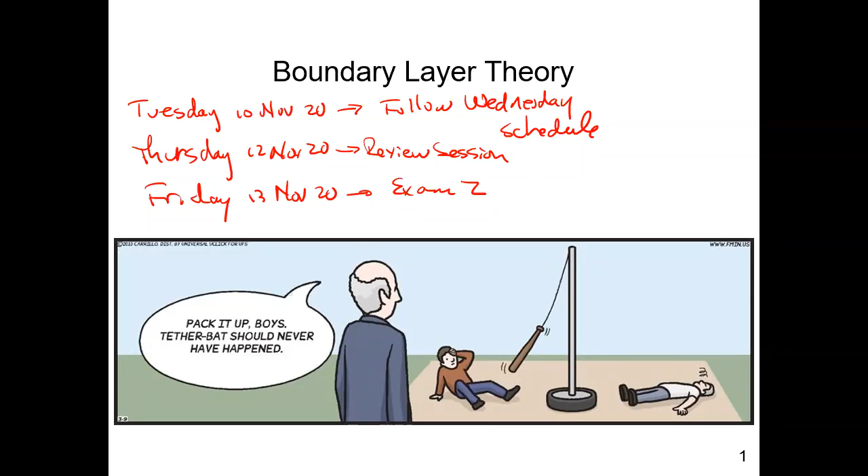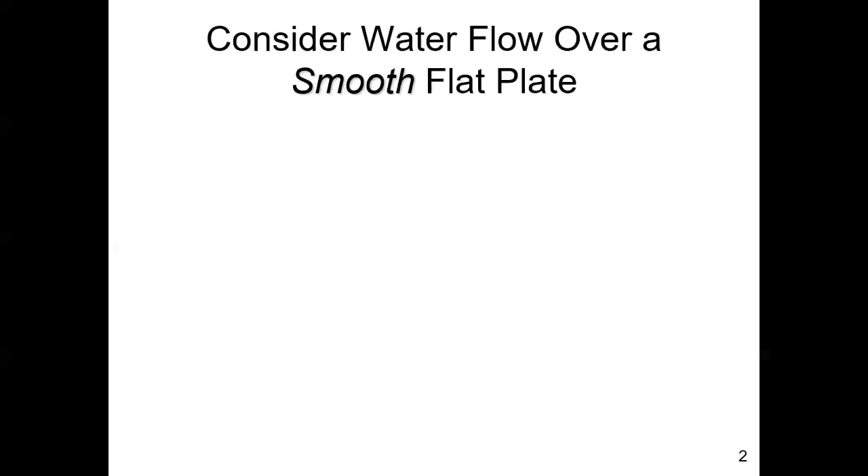So we're going to consider having a flat plate sitting in a fluid. Before the flat plate, the fluid is moving in this one-dimensional velocity vector.

It's just moving at a constant velocity, capital U, minding its own business. There is a fundamental fluid principle. It's never theoretically been proven, but it's been empirically measured many, many times. It's called the no-slip condition, and it's particularly true when you have fluids that wet solid surfaces, meaning they would like to stick to a solid surface. The no-slip condition says that the velocity of the fluid at a boundary has the velocity of the boundary. Very simple statement, no mathematics involved.

So the plate's sitting still and the fluid's moving over it. At the plate boundary, that fluid molecule will have the velocity of the plate, 0, it's just sitting there. However, because the fluid above the plate is moving, there has to be a transition in velocity from that of the plate, which is 0, to whatever that free stream velocity is, capital U. So instantaneously at the leading edge, you have one fluid molecule at 0 and the other one at capital U. Remember, the change in velocity over distance is the velocity gradient, and that's proportional to shear stresses.

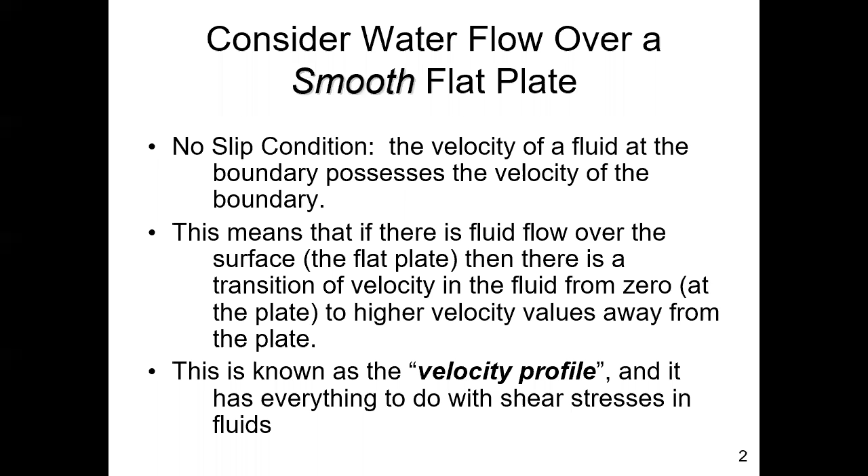So this is what I've been describing. You have, starting out right here, this velocity profile, and each of these velocities is moving at capital U. Then again, at the leading edge, this no-slip condition takes over, and what you see is the growth of this zone where the velocity is transitioning from U to the velocity of the plate. In this case, if the plate is fixed, it's at a velocity of 0.

You can see how this zone is occurring, in which U -- if this is the x dimension and x equals 0 starting at the leading edge, and y is perpendicular to that direction -- then this velocity profile, U, is a function of where you are in space in the y location. So if you're down at this location, you have a smaller value of the velocity than up here. Again, this is all because of the no-slip condition, and that is a signal. It's telling the fluid through this zone of transition that hey, there's a location where there's a boundary. That's all it does.

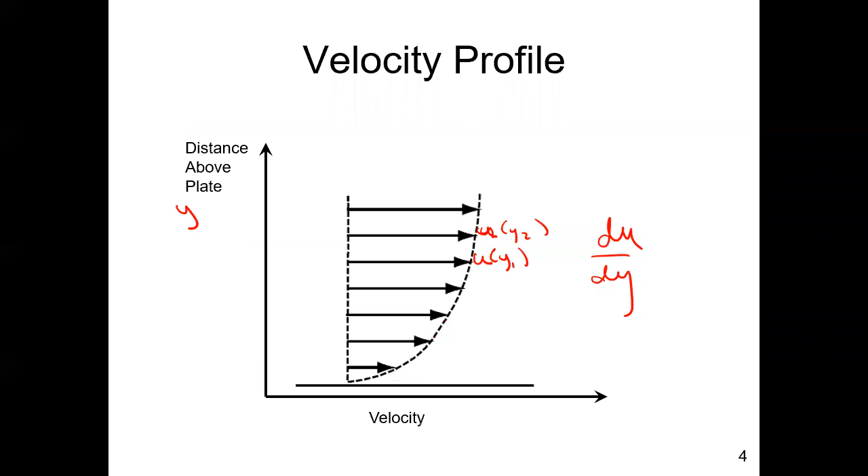So it's the distance from the solid boundary up to where you're back to the free stream velocity, capital U. We call that the boundary layer. And we live in the boundary layer. Many of the things we design occur in boundary layers, so this is incredibly important to everything we do in moving fluids around.

For the boundary layer, people have not theoretically derived the no-slip condition, but they measure it. That's called empirical evidence, so there are empirically measured characteristics of this boundary layer. The boundary layer is a region where fluid movement can be characterized by pretty structured movement, that is, the fluid is moving in laminae, sheets almost. That's one type of characteristic.

You saw this in your labs when you had the pipe and you were putting dye into it. The dye could stay in a nice, structured lamina as it moved.

The other end of this is where you have completely chaotic movement of the particles, and there is no structure or laminar movement. In this case, all the fluid movement is characterized as turbulent. Basically, turbulence is three-dimensional vortices always moving through the fluid. So at one particular point, the velocity could be all over the place, with components in all 3 directions. Those are the 2 end members: nice structured movement to completely chaotic.

In between is this transition area. In the transition area, you may have a subregion with laminar characteristics, but above that you have the chaotic movement of particles.

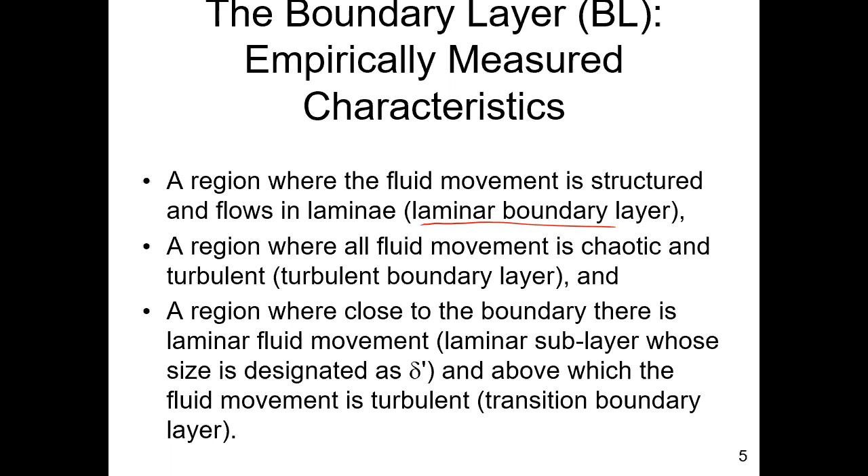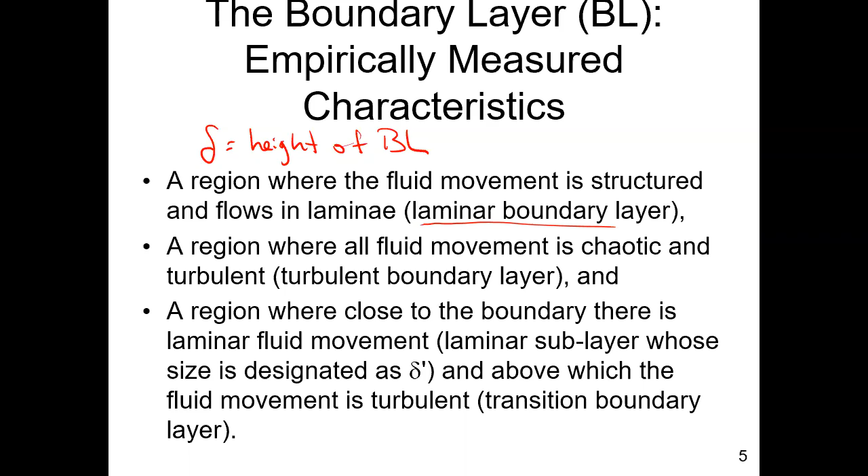So we'll call the height of the boundary layer delta. Delta goes from the solid surface to where the free stream velocity is again achieved. Where we're in this transition region, we may have a sublayer, delta prime, where everything is laminar. This is all in the handout for today.

In a sketch, the plate starts here, here's the x-axis, and the y-axis is in this direction. We have the free stream velocity everywhere at capital U, and then it touches that surface. That's when the no-slip condition starts, and everything follows through with that. So the boundary layer, this region where the velocity goes from 0 at the plate to the free stream, this boundary layer distance is delta.

There's a region where it's laminar, and then another region where it's all turbulent. These would be average velocities in here, and above this region we have the free stream. To the right is where we have chaotic movement of particles, the turbulent boundary layer as it's known. To the left we have a laminar region, and in between we have a transition.

What's happening in that transition is there's this laminar sublayer. At the very beginning, the leftmost portion of this region, the entire boundary layer is laminar. But at the very upper edge, those molecules, moving against the free stream velocity, become unstable, and turbulence initiates there. As you move through the transition region towards the turbulent region, this turbulence increases at the expense of the laminar sublayer. Ultimately, by the end of the transition region, that laminar sublayer has disappeared completely.

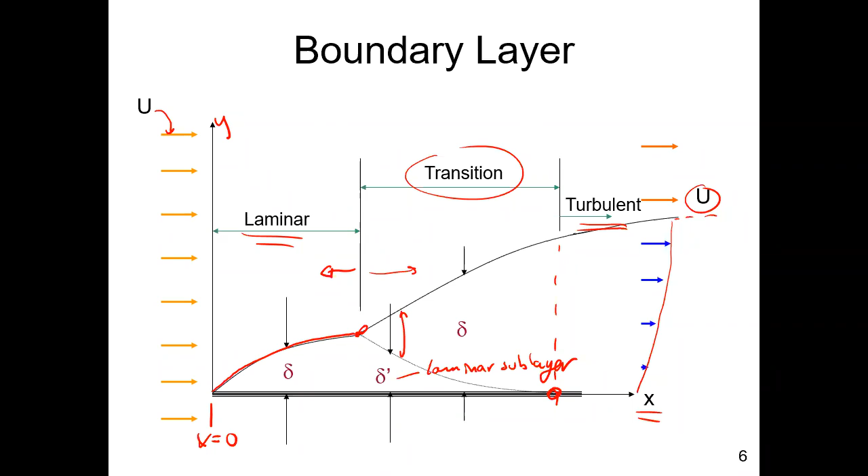This is actually incredibly important. We use this to our advantage in design, and many creatures have adapted their strategies to take advantage of this, if you believe the Earth is greater than 4,000 years old. For example, why a shark's skin is as rough as it is has everything to do with this diagram. Again, the height of the boundary layer is what we call delta, and the height of the laminar sublayer is delta prime.

So how do we classify these regions? Well, the laminar region occurs where the boundary Reynolds number, which I will explain, is less than 500,000. The turbulent region is where the boundary Reynolds number is greater than 10 million, or 10 to the 7th. This is all based on empirical evidence and measurements.

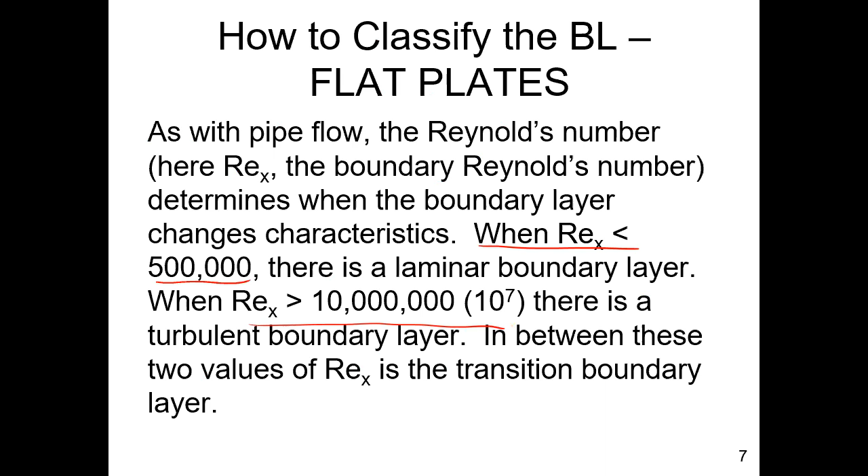Going back to this figure, for any particular situation we can calculate where the laminar region is, where this boundary Reynolds number equals the velocity times the distance along the plate, divided by the kinematic viscosity.

In some of your labs you've had to calculate Reynolds number. The Reynolds number is a force ratio. Even though the numerator and denominator don't look like forces, it's because certain things have been canceled out. In the numerator you have the force due to inertia, and in the denominator the force due to viscosity.

The Reynolds number is a dimensionless number. That means the dimensions on the numerator, velocity times distance, which is length per time times length, or length squared per time, have to be the same dimensions as the denominator. Kinematic viscosity has dimensions of length squared per time. So for any situation, to get that 500,000 you could have different values of U, different values of X, and different values of kinematic viscosity depending on the fluid. There's an infinite number of possibilities to get to 500,000.

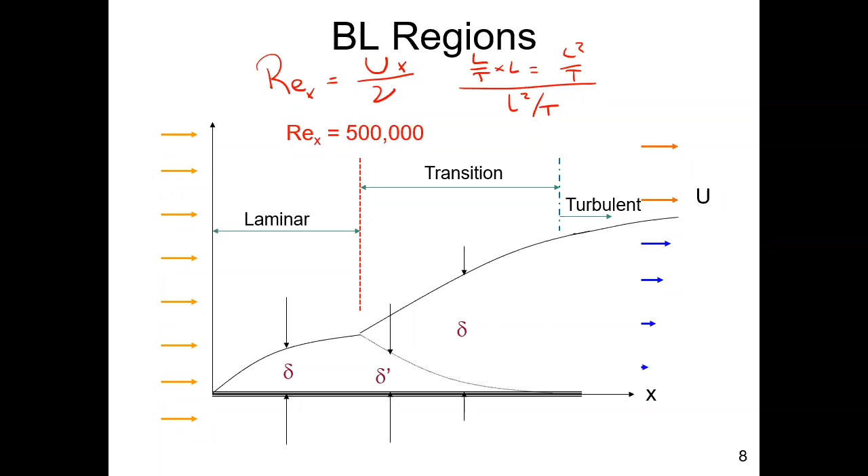Likewise, the turbulent region starts where the boundary Reynolds number is 10 to the 7th or larger, and again there are infinite possibilities to get the boundary Reynolds number greater than 10 to the 7th. If we're in between those two zones, we have the transition.

If you look at the last page of your handout, the handouts are over there in case you'd like to grab them, on page 6 there's a large table. This is often one of the pages people use for their crib sheet on the third exam, but all these equations are in your textbook, guaranteed.

You will see in the left column these variables, delta prime, delta. The next column is boundary Reynolds number less than 5 times 10 to the 5th. The rightmost column is boundary Reynolds number greater than 10 to the 7th. The center column is when you're between those two values. You have an equation for each variable depending on your boundary Reynolds number. Today we're just going to focus on the second column.

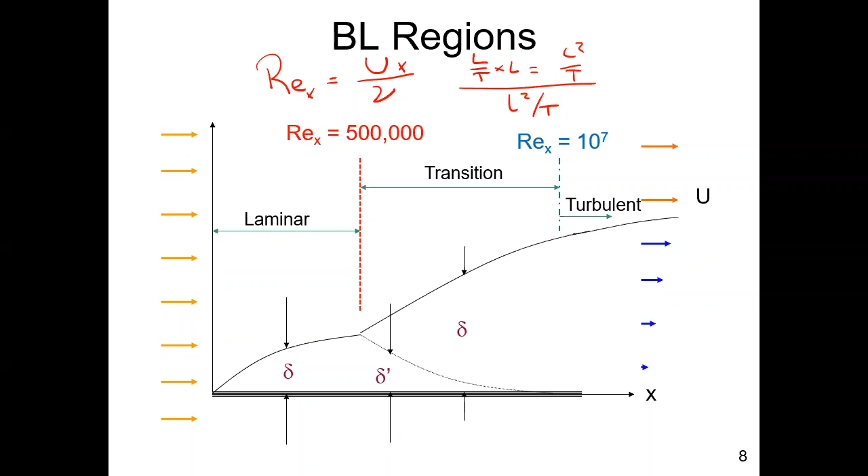We're going to look at the laminar system. Okay, so that's just a teaser. That's where we're headed, so let's get there.

Remember, the boundary layer is where velocity is changing vertically away from the plate. If you look at this, you have velocity on the horizontal axis and distance away from the plate on the vertical. Blasius made this into a dimensionless diagram. U over U0 is just U over capital U.

So that maxes out at 1.0. That's when you're at the very top of the boundary layer, and now you're going into the free stream. So the velocity right at the top of the boundary layer is almost the free stream velocity.

To make the vertical axis dimensionless, y over x is dimensionless, and to include some fluid properties, even though the boundary Reynolds number is already dimensionless, the vertical axis is a dimensionless number. This applies for the entire boundary layer, for any laminar boundary layer in any situation. What's nice about this is you'll notice the lower portion is linear.

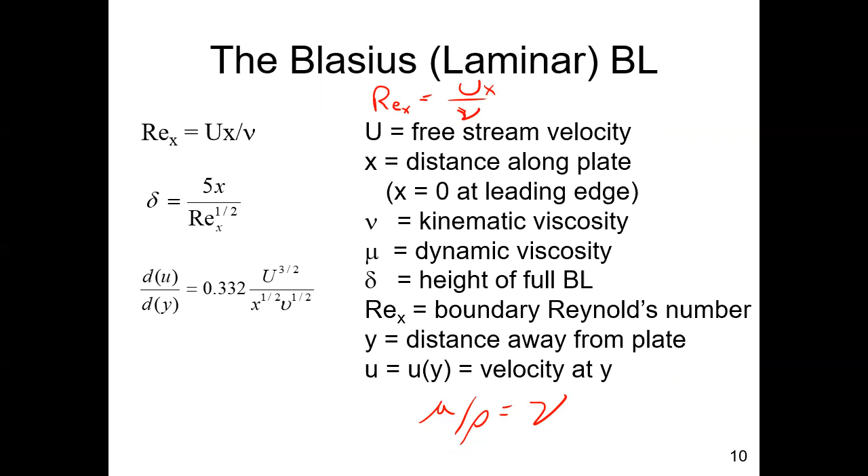The other thing you can deduce when you're looking at that linear section very close to the origin is that it has a constant slope. Remember, we had a plot of basically U versus Y. So du/dy, when you look at this equation, is the inverse slope. Half a dozen one, six of the other. You could look at dy/du, but to us, du/dy has relevance.

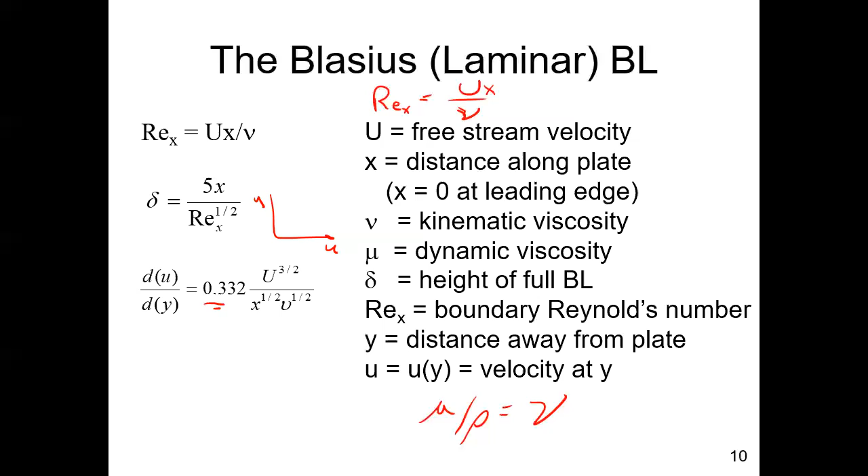So again, right from this dimensionless velocity distribution that Blasius had, the laminar velocity distribution, this has held up for over a century. Since 1900, this stuff has worked, and it's a very good descriptor of what's happening. So again, this is the velocity profile from which all those equations emanated, because we know the characteristics of this are known. And he based this on observations, but then actually theoretically derived it.

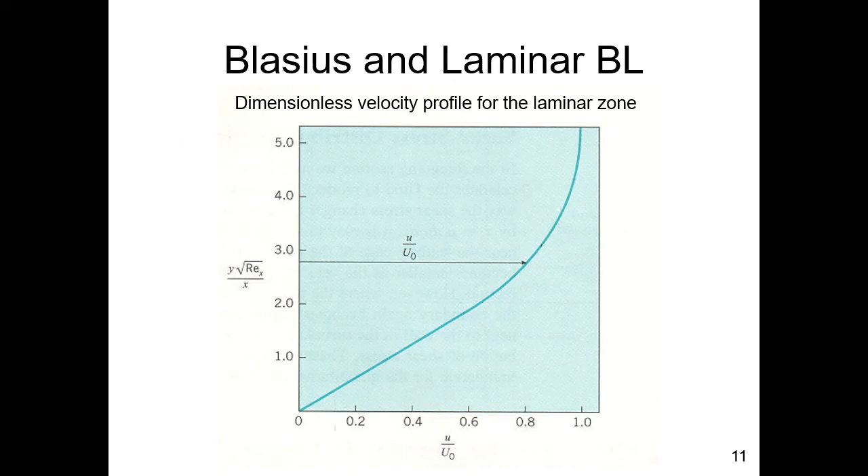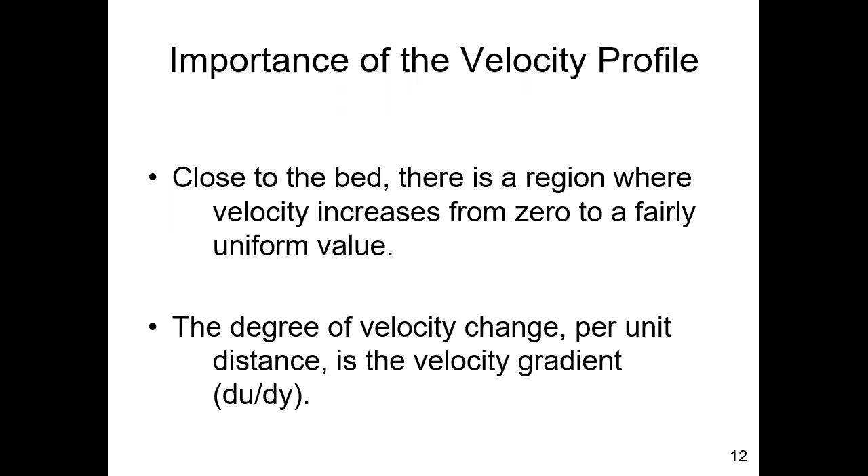So what's the importance of the velocity profile? Close to the bed, where the plate is, there's a region where the velocity increases from 0 to a fairly uniform value. The degree of velocity change per unit distance is the velocity gradient, du/dy, as we indicated before. I want to go back to this slide.

I think we're going to see it again, this one. So remember, we start here, and then we move onto the plate. We're going from the plate velocity to the free stream velocity. That's du. At the very beginning of the plate, it's happening over an incredibly small distance. As we move along the plate, that distance is getting larger and larger.

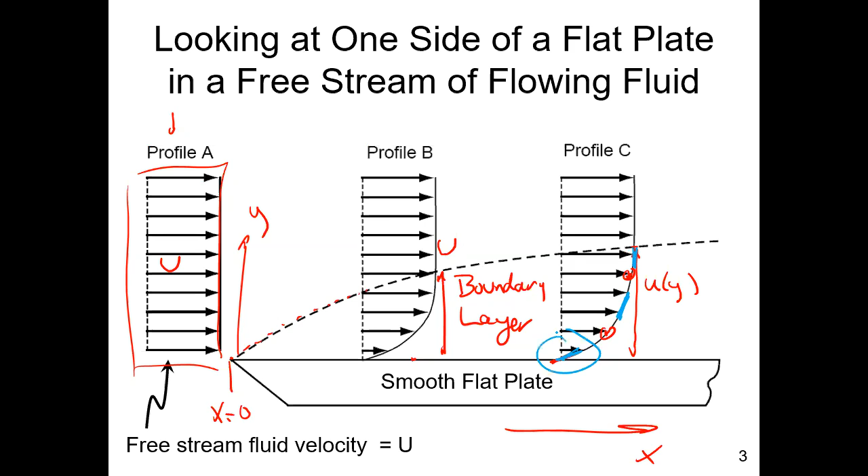So where is du/dy the greatest? Right at the leading edge, and also right along the surface. As you can see the slope here, let's change colors. The slope here, remember du/dy, is steeper closer to the bed than farther away. Ultimately, a vertical line is a slope of infinity, but we're looking at the inverse slope, so 1 over infinity is 0. So the steepest slope is closest to the bed.

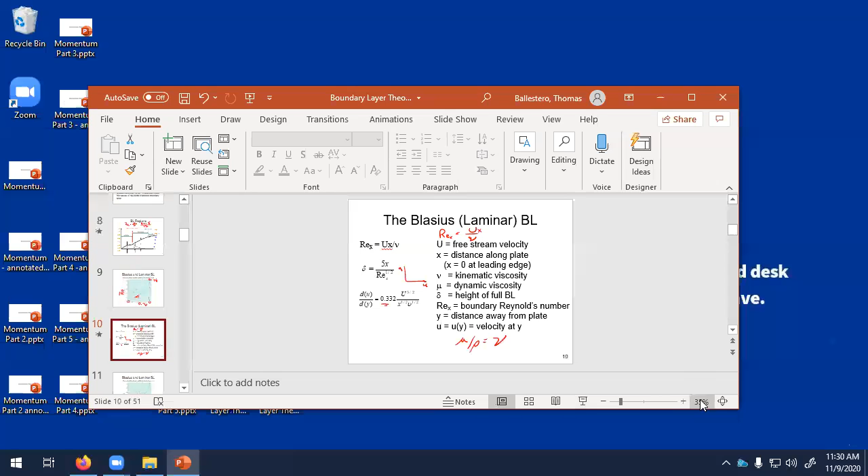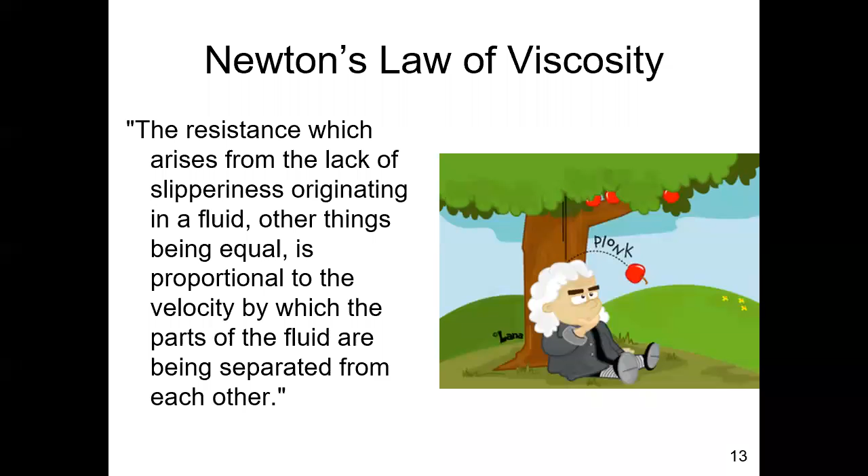So a long time ago in this very virtual class, we talked about Newton's concepts of what was happening within fluids. This is the translation of his actual original text identifying the relationship between velocity profile and resistance to movement. What Newton hypothesized was laminar flow, where you have one sheet or lamina moving over another, and they're moving at different velocities. Just like when you rub your hands together, you feel the heat occurring, that's due to frictional resistance. That's what's happening here. So there must be frictional resistance when you have relative motion of these laminae.

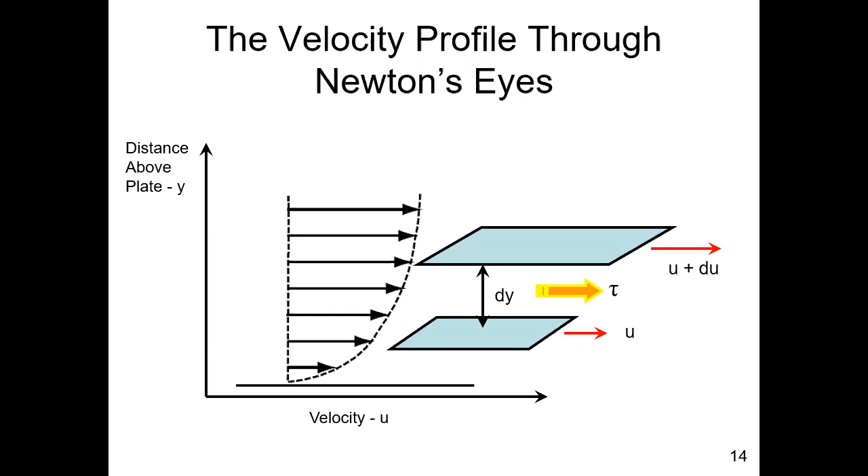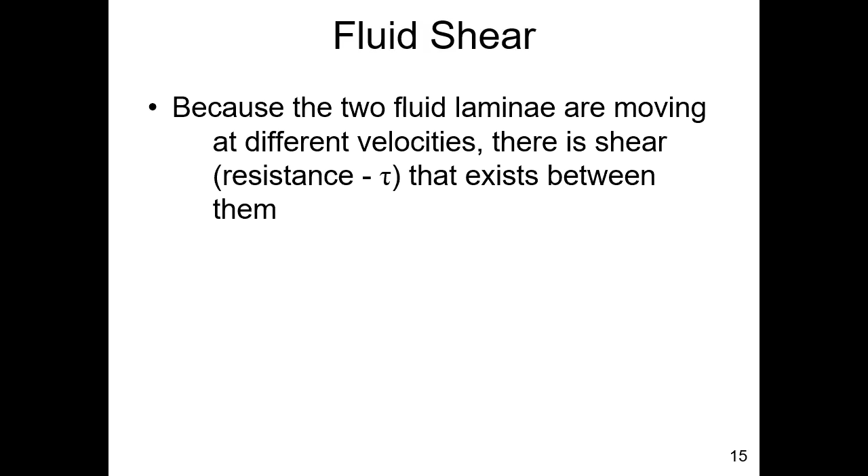What Newton hypothesized was that the magnitude of that resistance, which we call shear stress, is proportional to the velocity gradient, du dy. He theorized that when fluid layers move at different velocities, shear exists between them, and the shear stress should be proportional to the velocity gradient. Since it's tough to work with proportionalities in equations, he created a proportionality constant, the viscosity, which is what we used earlier when discussing fluid properties: Newton's law of viscosity.

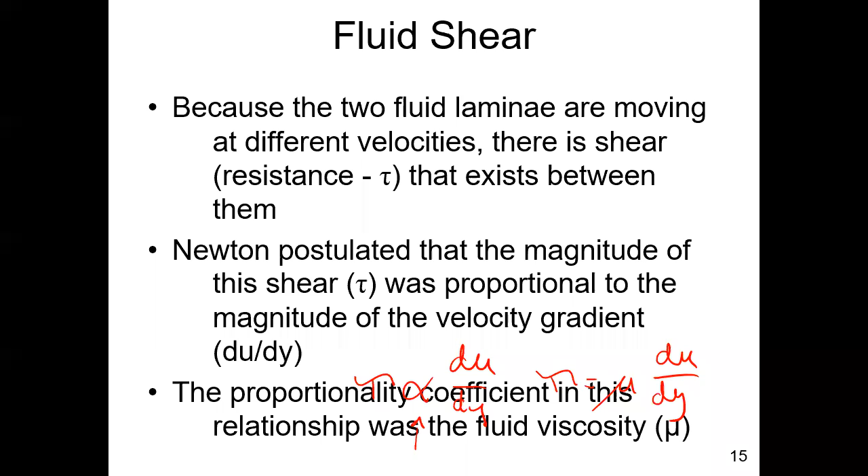Oh, what do you know? I'd already written it there. Okay, so this is Newton's law of viscosity.

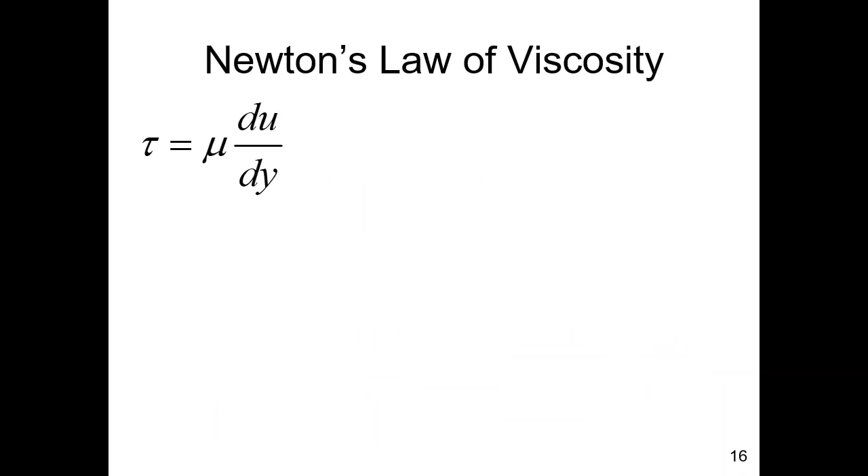We recognize from what Blasius did, du dy can be teased out of that dimensionless velocity profile. This is all in your handout. Du dy from the Blasius velocity profile is 0.332 times U to the 3/2 over x to the 1/2. So we can substitute this statement and solve for anything we want at that point.

So in this case, if we solve for the shear stress, and we look at a very particular shear stress, the shear stress right where y equals zero—that's why this is called tau zero, the shear stress right at the plate. That's where the velocity profile is the steepest, and that's where we'll have the highest shear stress.

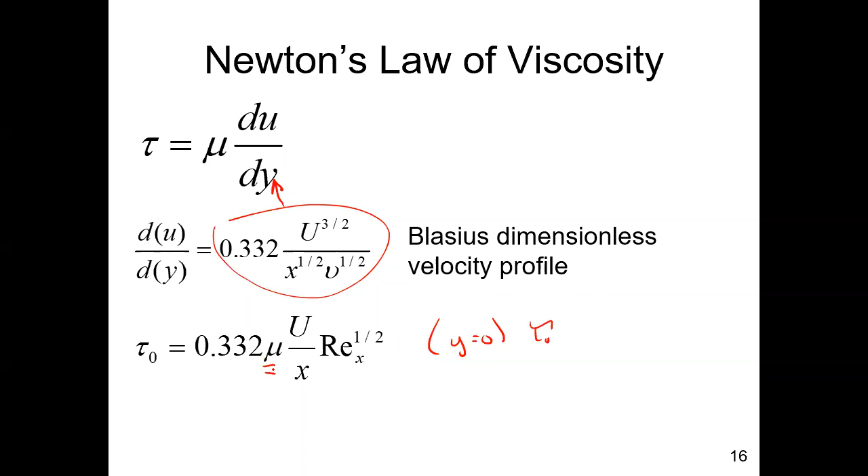So this would be an equation describing the shear stress along that plate at any distance x, due to a free stream velocity capital U and fluid with viscosity that is buried not only in the Reynolds number, but also appears in this first term, mu. Again, tau zero is the shear stress at the plate where y is equal to 0.

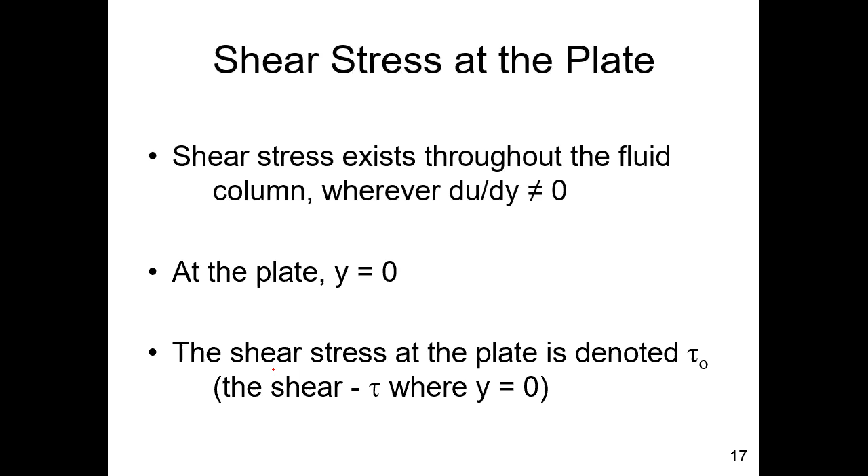So the shear stress exists throughout the fluid column, wherever you have the boundary layer. However, the most important shear stress to us is right at the plate boundary. Think of a stream—this is how we determine whether sediments are going to move or not. The stream creates a shear stress on the bed, and each particle has a resistance to that movement. This is what we use to figure out scour or deposition in streams, and also how many horsepower you need for your boat. It's all due to frictional resistance.

As we move along the plate, du stays the same—plate velocity to free stream velocity—but the distance between them, dy, keeps increasing, and so the shear stress goes down. Likewise, as you go along the plate, the boundary layer keeps growing. Sometimes in engineering we try to control that boundary layer height, or more importantly, we try to control the shear stress.

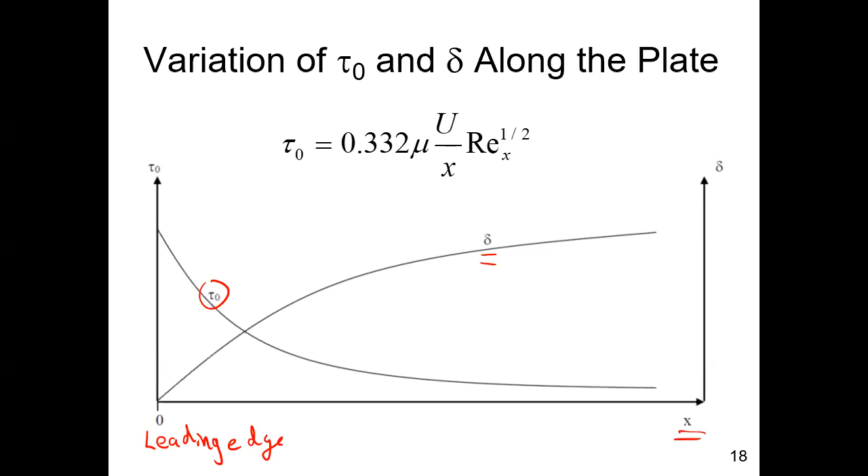So this was the equation that we derived from looking at Newton's law of viscosity and what Blasius determined for the dimensionless velocity profile for the laminar zone. Again, it all goes back to describing what everybody observes.

So typically in fluid mechanics, instead of using that form of the equation we just derived for Blasius shear stress, people like to relate shear stress—tau zero, the shear stress on the plate—to a momentum concept. Remember, we just finished momentum: rho Q V, rho times velocity squared. Q is velocity times area, so rho A V squared, rho V squared is a momentum term.

So commonly what people do when looking at shear stress in general is relate shear stress to rho U squared. In this momentum form of the shear stress equation, the shear stress tau zero is equal to 1/2 rho U squared, and C sub F is a shear stress coefficient.

That's a lowercase c sub f. Unfortunately, I try to stay consistent with the nomenclature in your textbook. We have a capital C sub f we're also going to be using. So this is lowercase c sub f, and it's known as the shear stress coefficient.

However, when we solve this equation for C sub f, we can also take the Blasius form of the shear stress equation at the plate itself. And then we would combine those two, and we can get the shear stress coefficient for the Blasius equation. I'm going to be talking about using all these. Right now, we're just developing them.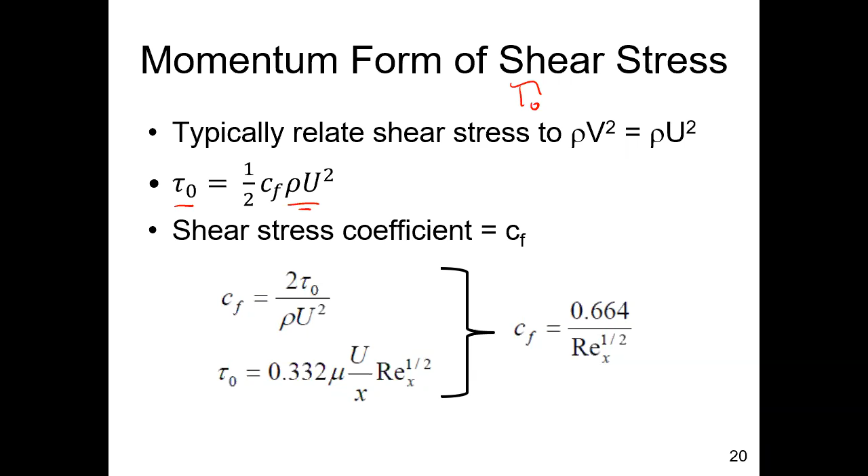So again, this sheet is your Rosetta Stone, ultimately. And we're going to be walking through it for all the different types of scenarios. Today, we're just talking laminar. Ultimately, you don't know what type of boundary layer you have - that's one of the first things you have to figure out. Once you know what you have, you know which set of equations to use. So we're trying to make this methodical, so we can calculate the shear stress coefficient.

However, to take it one step further, you can integrate this shear stress over the entire plate surface area. And when you do that, what you get is the shear force due to friction. This is also colloquially known as the drag force. And we're going to be talking about drag next. So when we integrate the shear stress right at the plate boundary, all over the surface of the plate, we get the resistance.

So we know this is the equation for the shear stress at the boundary, tau zero. We can put that into the equation, and quite honestly, all you have in there is REX over X that would stay in the integral. So you can get a direct solution for this. And again, this is all from the Blasius dimensionless velocity profile, which is only good for the laminar zone.

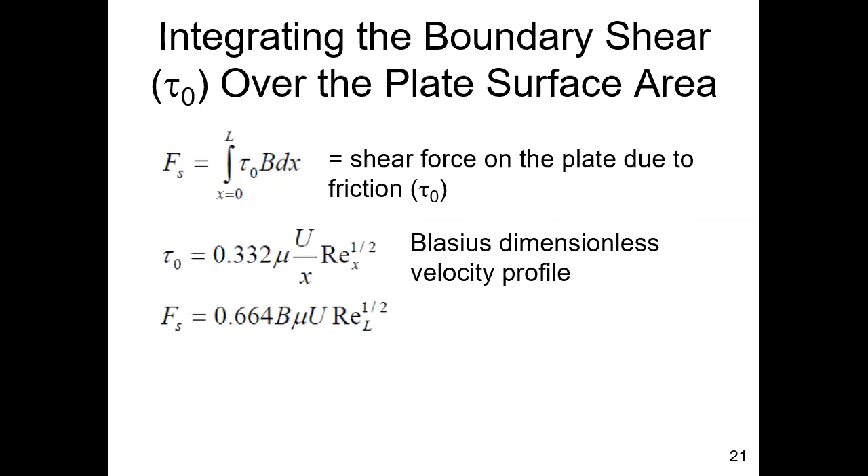When we do that integration, this is the equation we get. Think of pulling a flat plate through a fluid - this is the force you would need to pull that flat plate through the fluid. Same thing for an airplane. And then ultimately that's converted to power. Now you know how much fuel you have, now you know how to size the fuel tank, now you know how to size the thrusters, everything.

So in that equation, REL - since we integrated from the leading edge to the trailing edge, at the trailing edge, X is equal to L. What comes out of the integration is REL, and REL is the boundary Reynolds number at the trailing edge, where X is equal to L. So it's no different really than REX, it's just at a very specific location. And B is the width - since we had to integrate over the area, if we were looking down on the top of this, this is the X direction. So this was the leading edge down here, and this is just the width of this thing, B, into and out of the board, into and out of the screen, into and out of your paper.

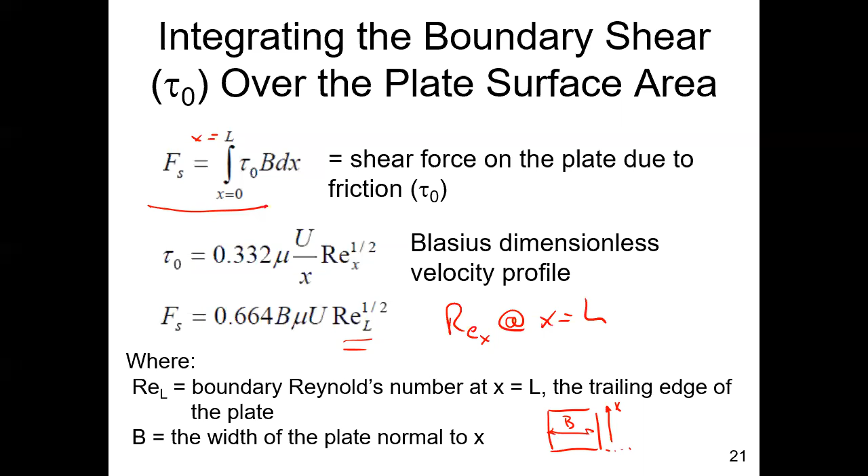And again, if you look at how this was developed, people like to put shear stress and force in terms of momentum terms, rho u squared. And so in a momentum equation, this would be the momentum form of a shear force equation. The only difference is now you see the area in there, and this capital CF is in there. This is the shear force coefficient CF, also known as the drag coefficient.

But it's a drag coefficient because we're only considering frictional resistance. There's more to drag than just frictional resistance. If we rearrange the equation above, what we find is that this shear force coefficient, this drag coefficient, capital C sub F, is in terms of the shear force and the dimensionality.

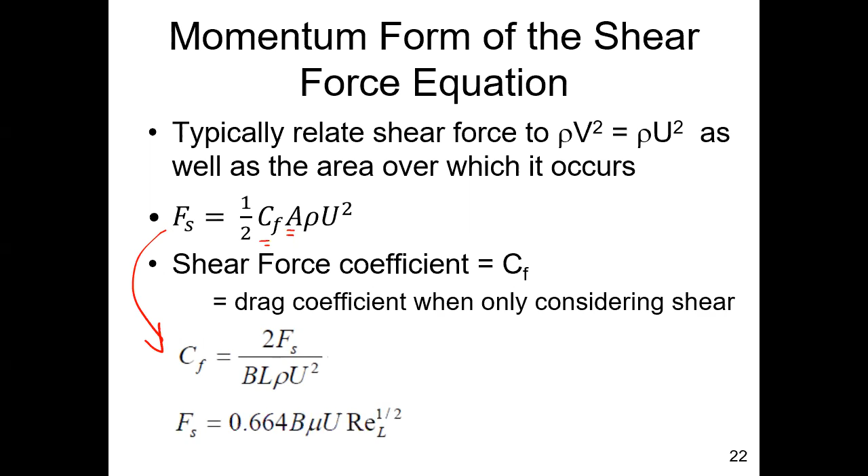We have the Blasius equation, which is also the shear force equation. We can substitute the second into the first, and that gives us the drag force coefficient, which again, if you look at page 6, that's what you'll see in the second column for capital C sub F. This is where everything was developed.

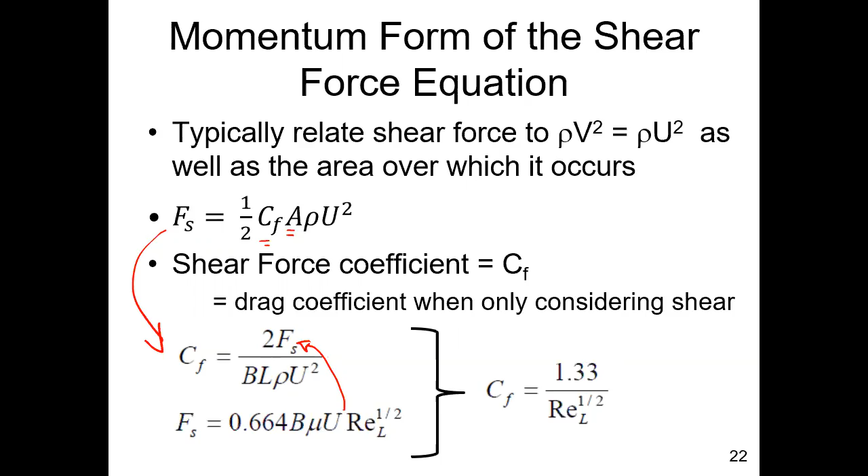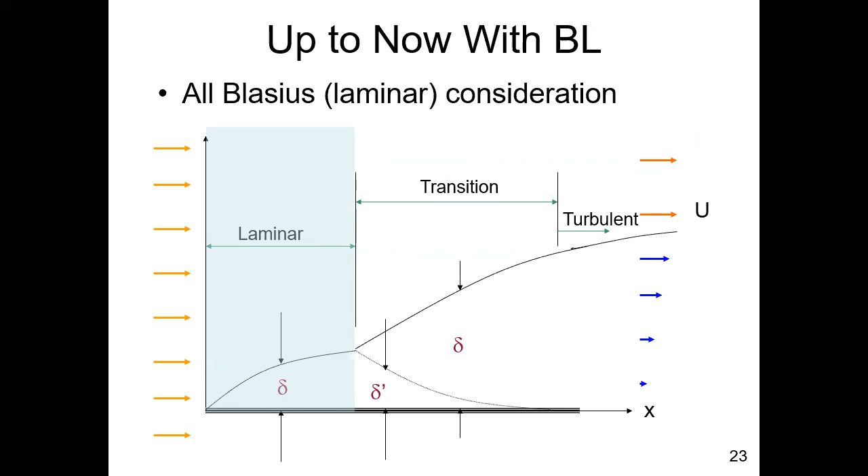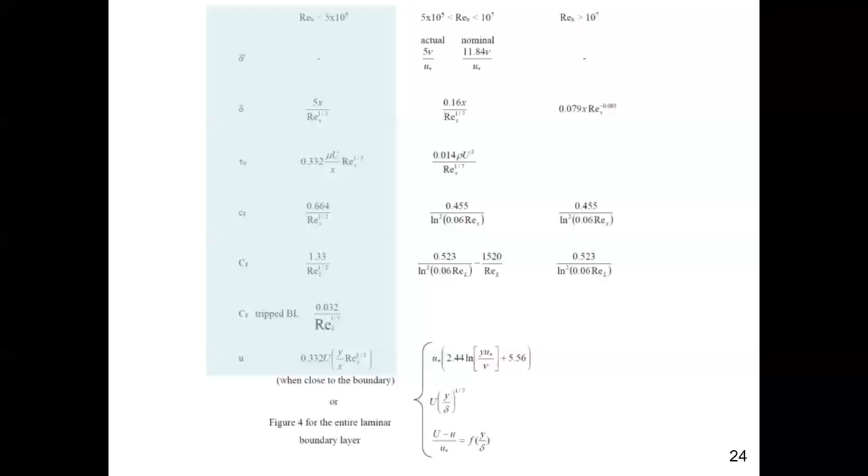So up to now, this is what we've been describing, and up to now we're only talking about this zone. After today, we'll move into the other two zones. Today I just want to focus on really understanding what we're doing here. If you can understand what we're doing in this zone, you can really understand everything else on page 6 and which equation to use. So again, we're just focusing on page 6, these first two columns, and I'm going to do an example with these first two columns. Then next class we'll talk about the other two zones.

So here's an example. What force is necessary to pull a flat plate, 1 meter in length, 0.5 meters wide, through water at 0.1 meters per second? What's the power required to do this? The plate is completely submerged.

So for example, it's in water. Did I say it's in water? Yeah, it is. So let's say here's the water surface, and what you have is it's moving at 0.1 meters per second. So this is relative motion. Originally, we had the plate sitting still and the fluid moving by it. And if you are an observer moving with the plate, it appears that the plate is sitting still and the fluid is moving by it.

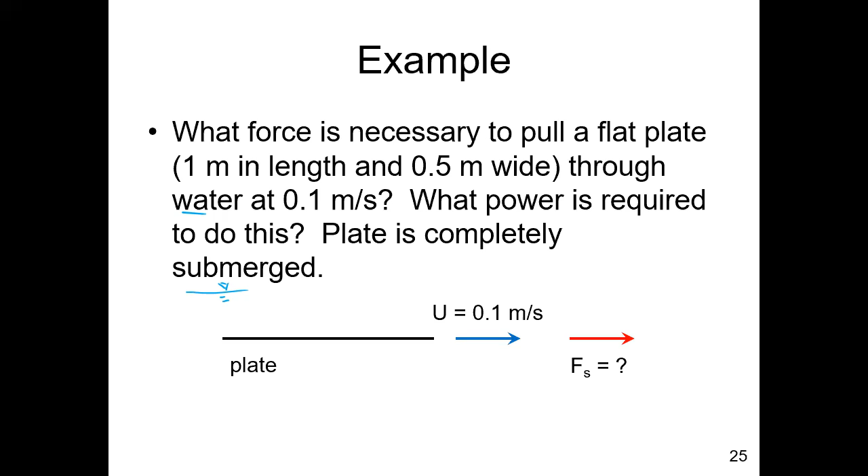So relative motion, and we need this force necessary to create this exact motion. So this is what it's after. And then once we get the force, we can get the power, the same way we were talking about power and momentum.

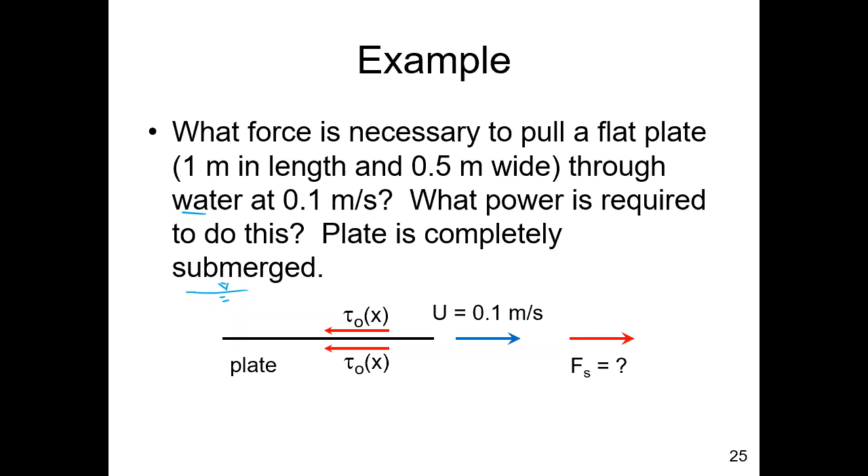That force and this velocity is creating shear stress on both sides of this plate. Some of the problems you have to recognize that only the bottom side of the plate is being submerged, for example, the bottom of a barge. So always be careful that you know what you're talking about or what they're asking for when they ask you about these shear stress problems.

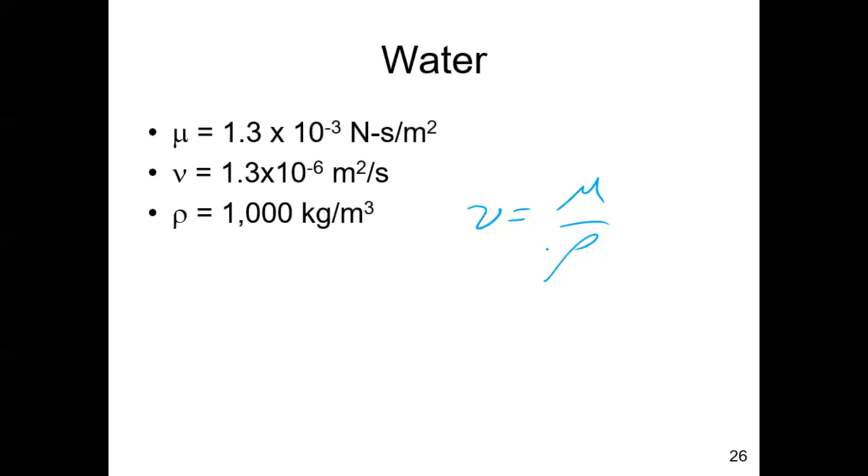So we know we have water. I went to the back of my book and looked up these water properties, the viscosity, the kinematic viscosity, and the density. And remember, nu is equal to mu over rho, so you can see how everything works together and that all the dimensions are consistent.

The first thing you have to understand when you're looking at these classes of problems is, do you have laminar, transition, or turbulence? This is the text you saw in an earlier slide. We need to calculate the boundary Reynolds number to figure out which zone we're in. The boundary Reynolds number, Re_x, is UX over nu, so X is equal to 0 at the leading edge.

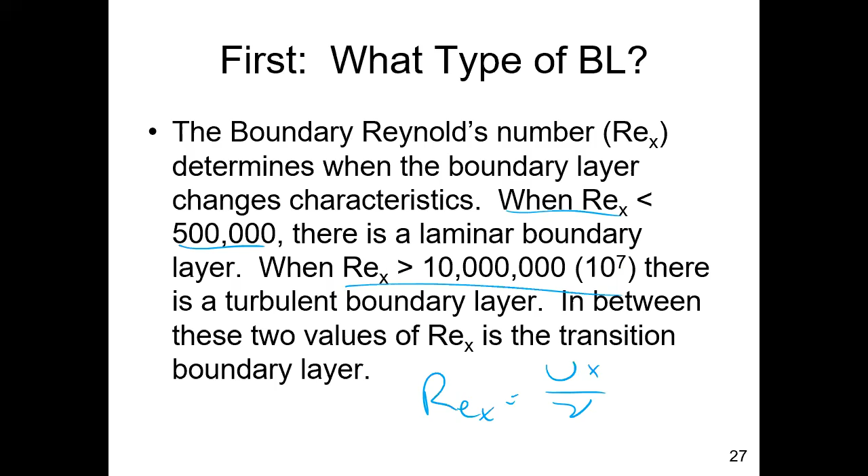Where is the boundary Reynolds number going to be the largest for this plate? Capital U doesn't change, viscosity of the fluid doesn't change. At the trailing edge, whereas X is equal to L, right? So at the trailing edge, this is the boundary Reynolds number at the trailing edge: it's the free stream velocity times the length of this plate divided by the kinematic viscosity.

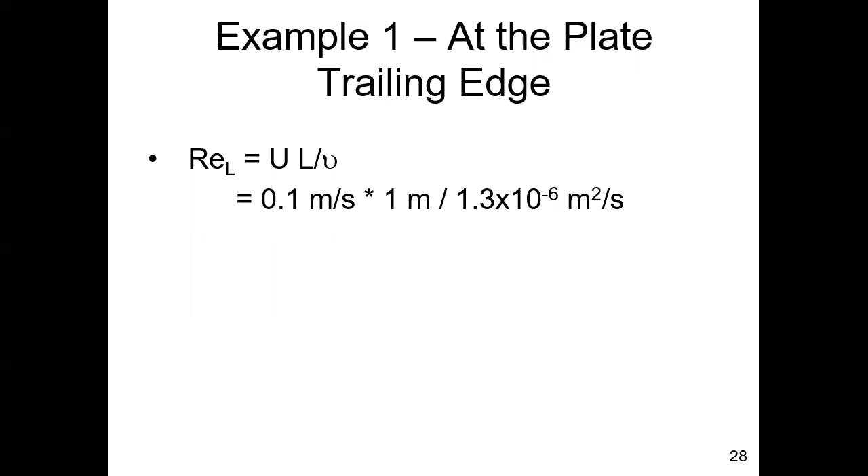Free stream velocity, 0.1 meters per second. The length is 1 meter, and the kinematic viscosity is 1.3 times 10 to the minus 6. Something's wrong, that can't be right. You've got, this should be 100,000. So you've got, oh, that's not, this is okay, it's okay. I saw that as 1, it's 1.3. The number's okay. Let's see if I can reset.

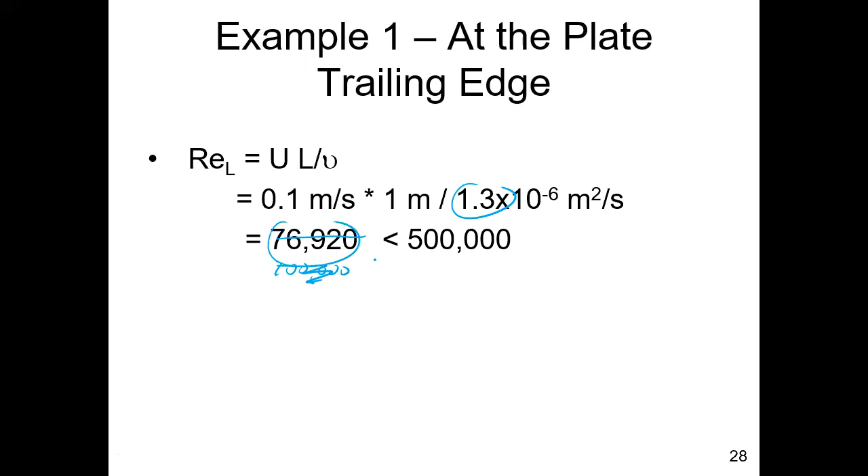This is okay. So, because 76,920 is less than 500,000, you have a laminar boundary layer at the trailing edge.

As you move back this way, as we just discussed, the Reynolds number keeps decreasing because X is decreasing. So over the entire plate, you have a laminar boundary layer, so we can use Blasius's theory and everything that we developed today.

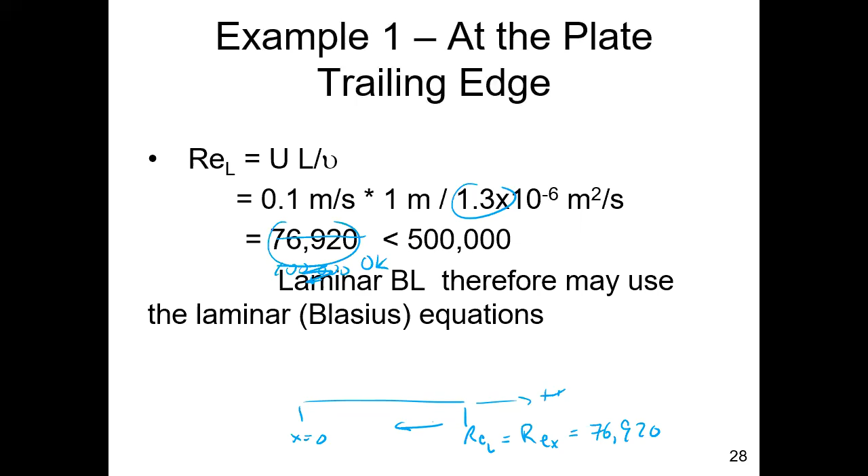So for the shear force on the plate, this is the momentum form of the equation. This was the shear force coefficient, the drag coefficient. We can certainly use the Blasius equation, but again, this CF was developed from that. So the shear stress coefficient is 1.33 over the boundary Reynolds number at the trailing edge. We just calculated that to be 76,920.

76,920 to the 1/2 divided into 1.33 gives us a shear stress coefficient of 0.0048. And then everything else in this equation on the right-hand side, we know. So the shear force is 1/2 times CF times the area of one side.

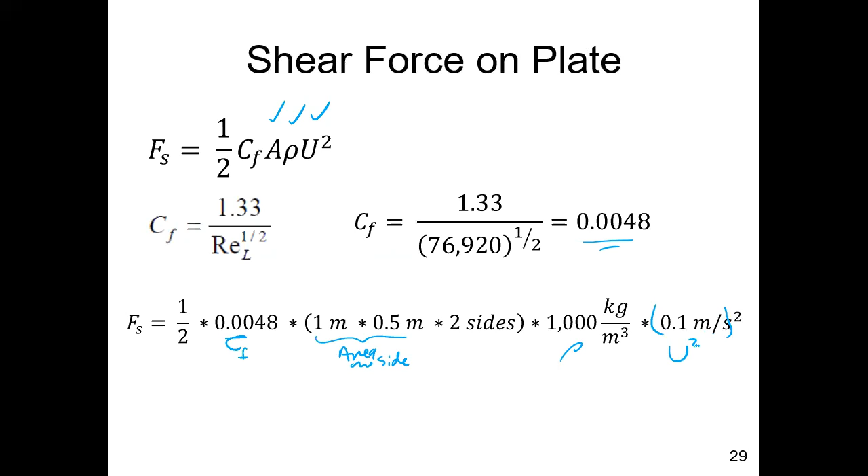We multiply by two sides. This is our density, rho, and this is the velocity squared, which should be in parentheses. When we calculate that, we get a force of 0.024 newtons.

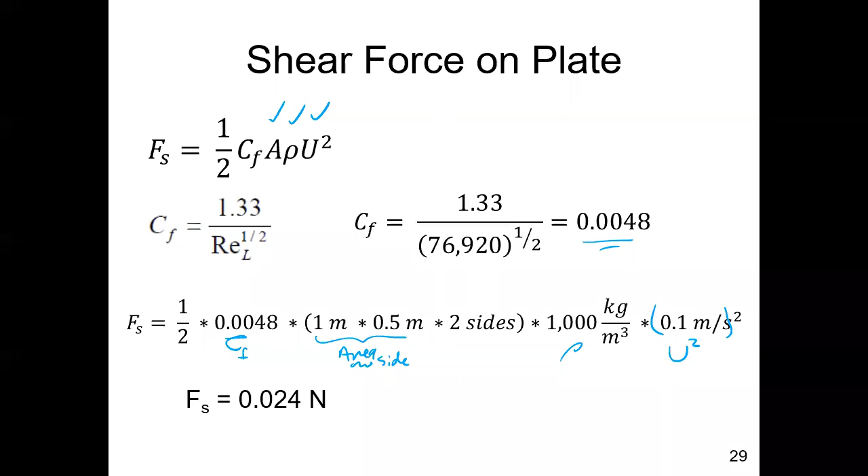Not a heck of a lot, but that's what it is. Any questions on that? Power, remember when we were talking about moving vanes? Power is force times velocity. So in this case, we have the velocity of the plate, which again, in a relativistic sense, this is the free stream velocity. And we have the force we just calculated of 0.024 Newton. The force times the velocity gives us a power in watts, 0.0024 watts. That wasn't so bad, was it?

So again, we need to recognize first in all of these classes of problems, what is the boundary Reynolds number? Once you know what that is, it tells you which column of the equations to use. We knew today we were spending on laminar, we knew we were going to be in that laminar zone. And just remember that the laminar zone...

The laminar zone is where we have the Reynolds number less than 500,000. In this problem, it was like we were working from like 76,000. Was it 920? 290? What was it? 920. So really, this was our problem that we just worked, all laminar boundary layer, well within the laminar zone.

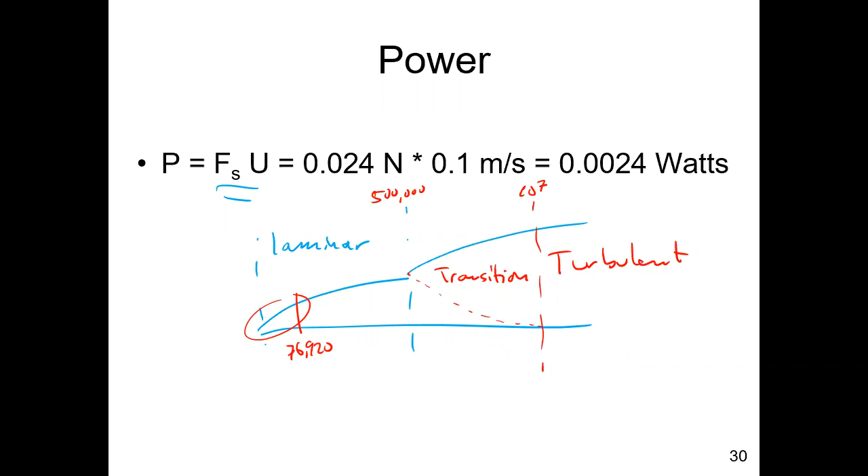Next time, we're going to talk about being in the transition or the turbulence zones. So again, you can put your pencils down. This is all spinach for the brain.

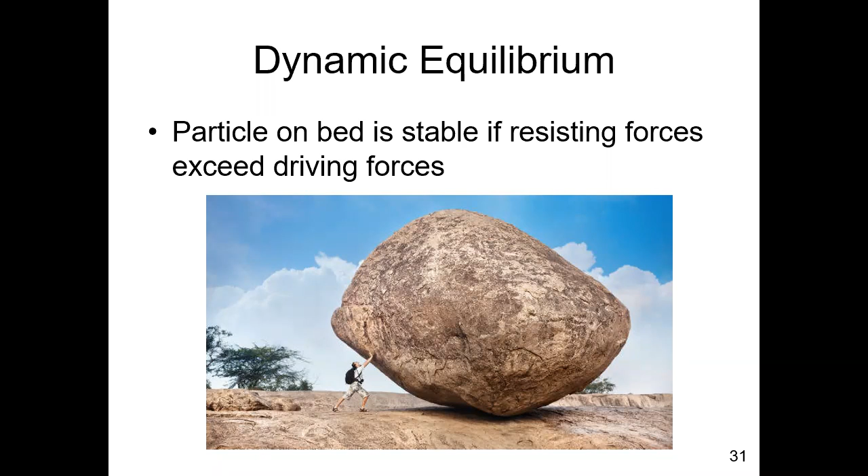But again, whether it's moving a particle in air, aeolian transport, like sandstorms, have you heard of haboobs? Big sandstorms that hit Arizona or any desert area. That's transport of a particle against its ability to resist the shear stress of the fluid. So basically what we do is we compare what the fluid creates to what the particle can resist.

So typically tau c, the resistance, is a function of the particle size. The larger the particle size, the more it can resist. And so we calculate tau zero, the fluid's ability to create shear stress on the bed. And if it doesn't exceed the ability to resist, the particle stays there. Same thing with a fish swimming.

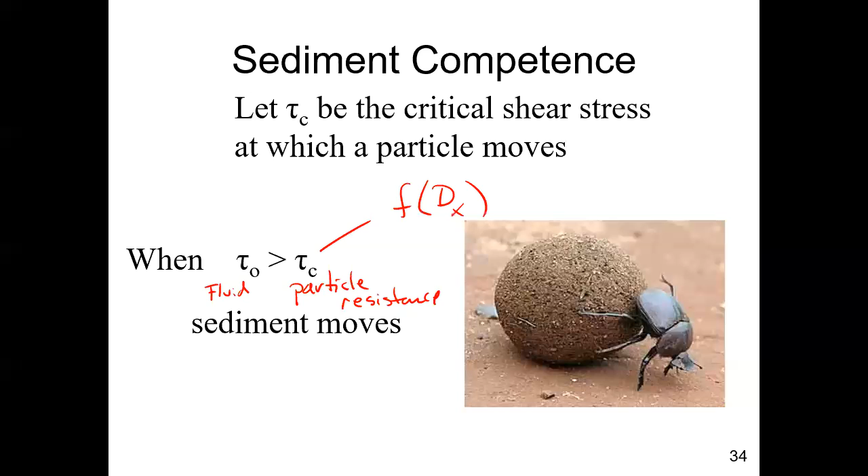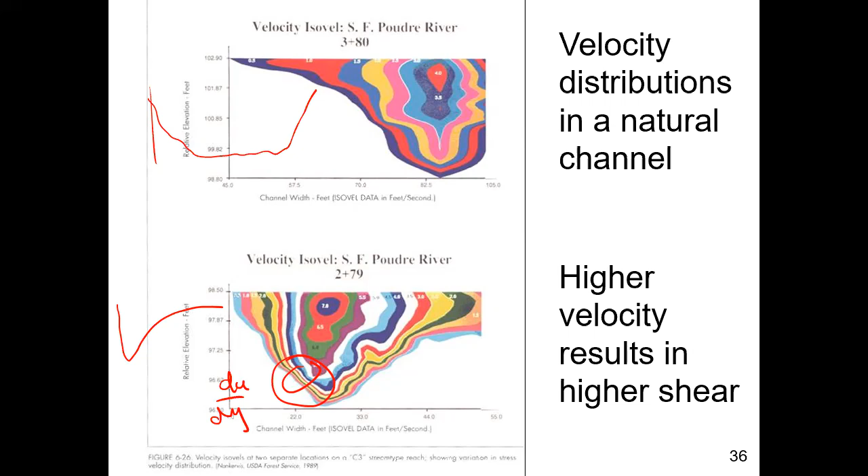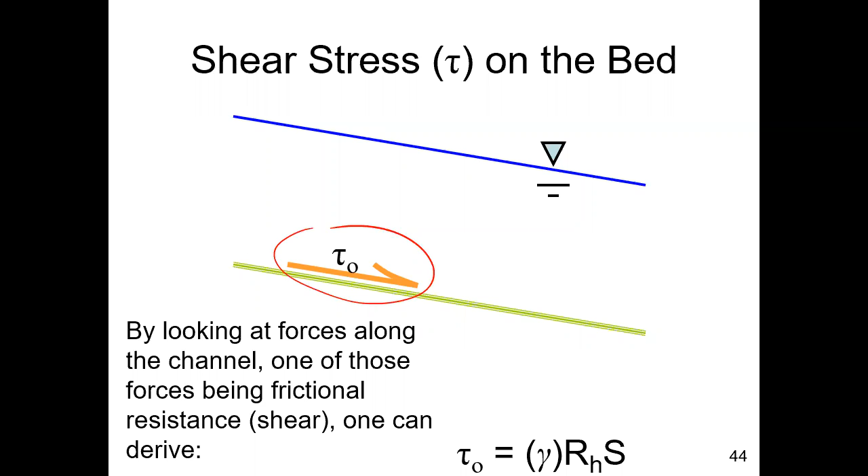And of course, there are all different ways to describe resistance to flow, but ultimately we can describe the resistance on the bottom of the channel using the same precepts that we developed here. And then ultimately we can start to look at how the shear stress relates to particle size.

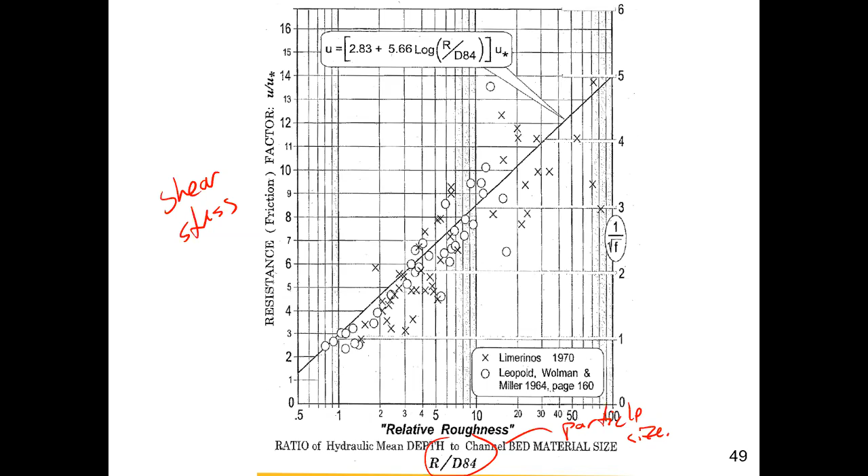And these are actually what we use when we're looking at designing sediments. So let's say you wanted to design a riprap swale. You need to figure out which particle is going to be resisting the stream shear stress. So again, you can look through all of those. That's all spinach for the mind. I just threw that in there for you. Questions?